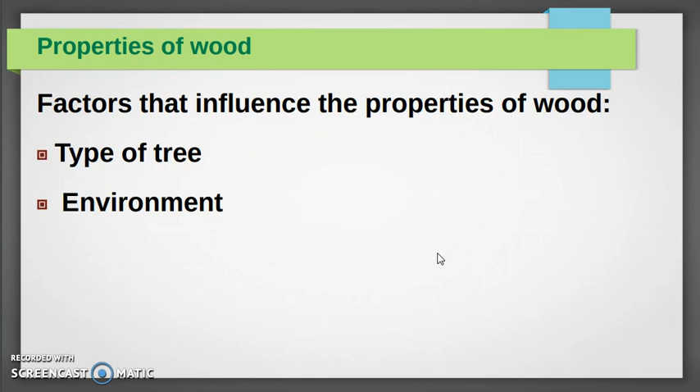Environment. Depending on the type of environment where the plant grows, the properties will change also.

The soil is the earth in which plants grow. Depending on the soil where the tree grows, the properties of wood will change also.

Age of tree. As you can imagine, the properties of wood will change from a young tree to an old tree.

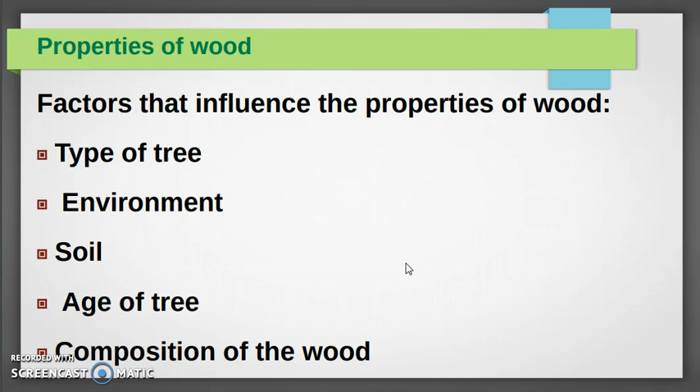And the composition of wood. Wood is composed by lignin and cellulose fibers. Do you remember? So depending on the amount of the two substances, the properties of wood will change also.

Now let's study physical properties. The first one is hardness, dureza. Wood is soft. Why? Wood is soft because it can be penetrated, penetrated by objects such as screws or nails.

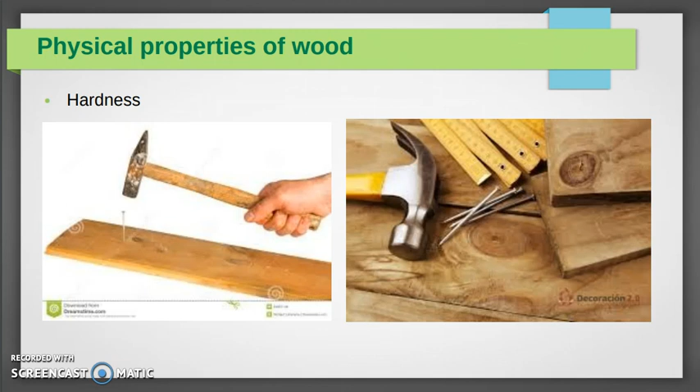This is one of the most common systems to join pieces of wood.

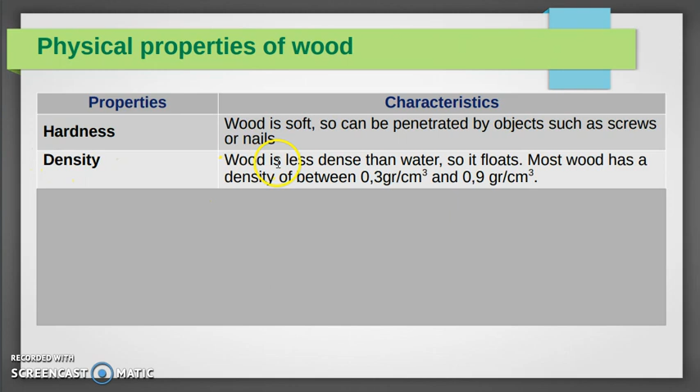The second property is density. Wood is less dense than water, so it floats. The density of water is 1 gram per centimeter cubic, and the density of wood is from 0.3 gram per centimeter cubic until 0.9 gram per centimeter cubic.

So, as the density of the wood is less than the density of the water, the consequence is that wood floats on the water.

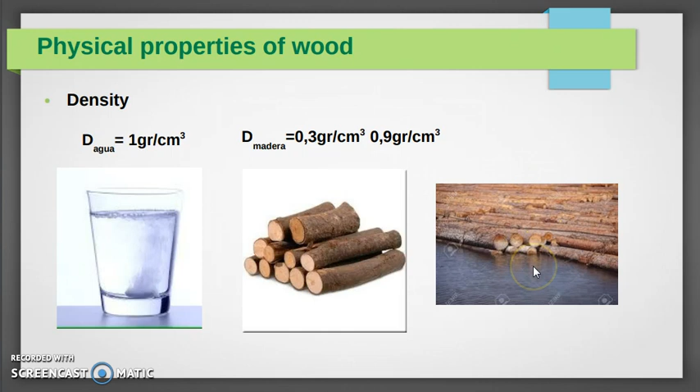Electrical insulation. Dry wood provides good electrical insulation.

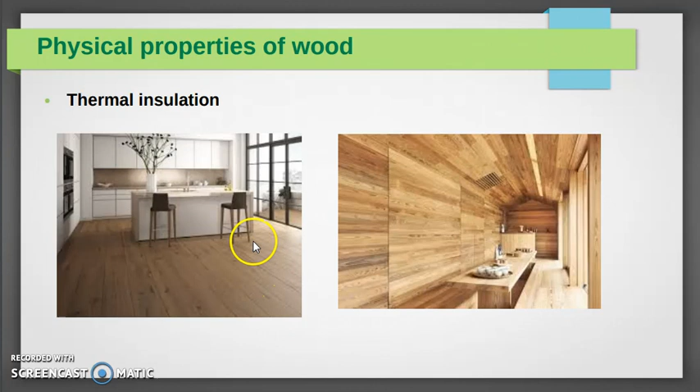Porosity. Wood can absorb or emit liquids or gases. Why? Because it has tiny holes called pores.

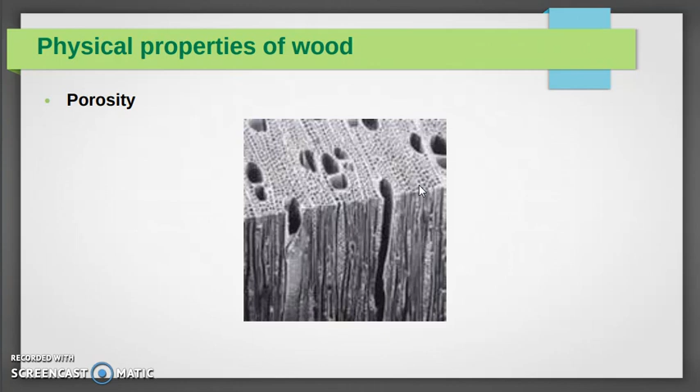Mechanical resistance. Wood has good mechanical resistance.

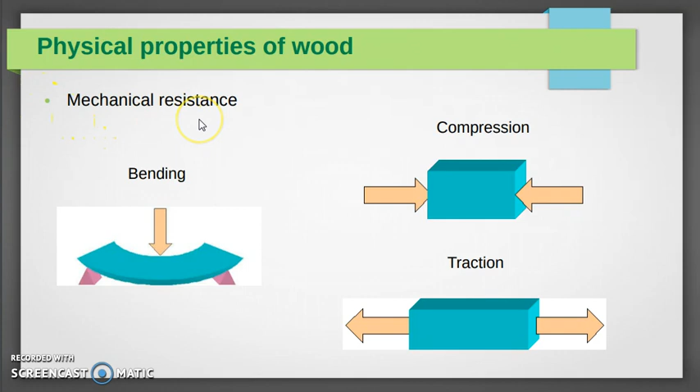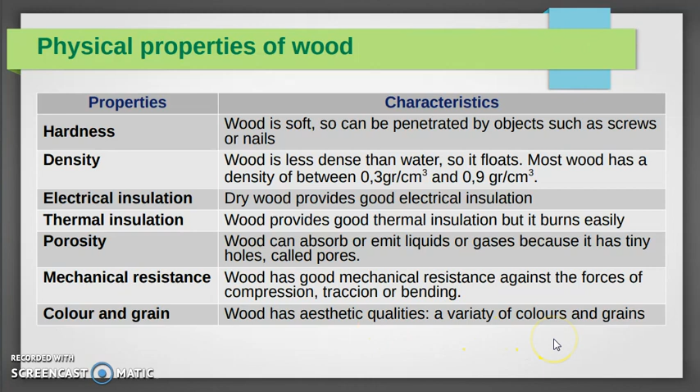And color and grain. Wood has aesthetic qualities, a variety of colors and grains. As you can see, there are many different types of wood with different colors and different grains.

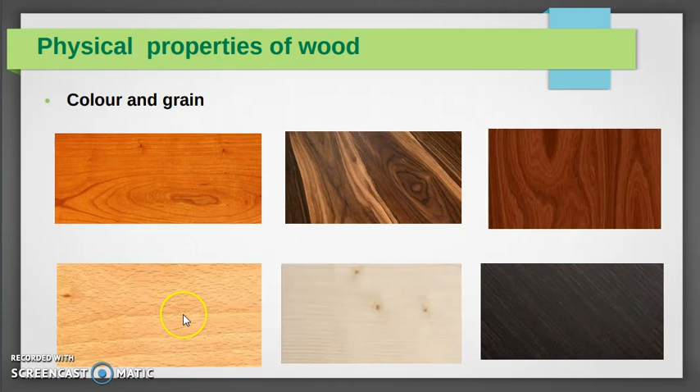Okay, and now at the end, let's try to study the ecological properties of wood. The first one is that wood is a renewable raw material.

What's the meaning of that? That new trees can grow all the time. That's why we consider wood as a renewable material. But don't forget that deforestation causes serious damage to the balance of our ecosystem.

Second property, wood is biodegradable. What's the meaning of that? That wood decomposes as time passes.